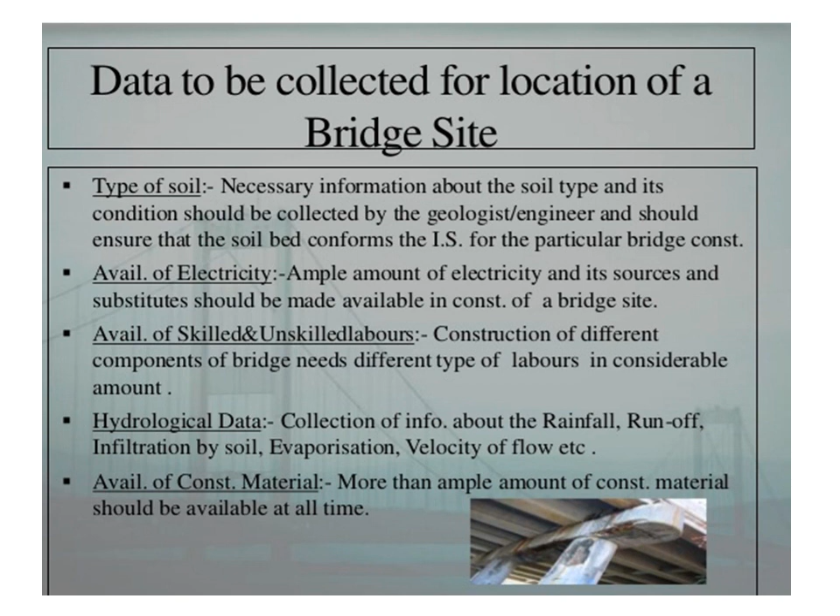Then in the hydrological data, the collection of information about the rainfall, runoff, infiltration by soil, evaporation and velocity, etc. has to be seen. Then the availability of construction material. More than ample amount of construction material should be available at all times. This is very much essential in order to maintain the economy of construction of the bridge.

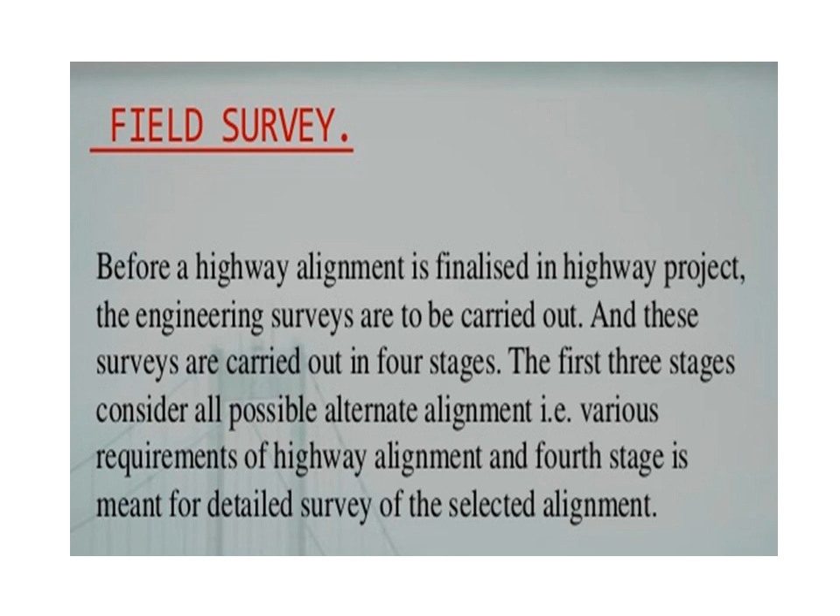After getting the data necessary for bridge location, we have to do the field survey, and in the field survey the highway alignment is finalized in a highway project. For that, engineering surveys are to be carried out in 4 stages. The first 3 stages consider all possible alternatives, that is various requirements of highway alignment, and the 4th stage is meant for detailed survey of the selected alignment, which may cover the reconnaissance survey, preliminary survey, location survey, and then detailed survey.

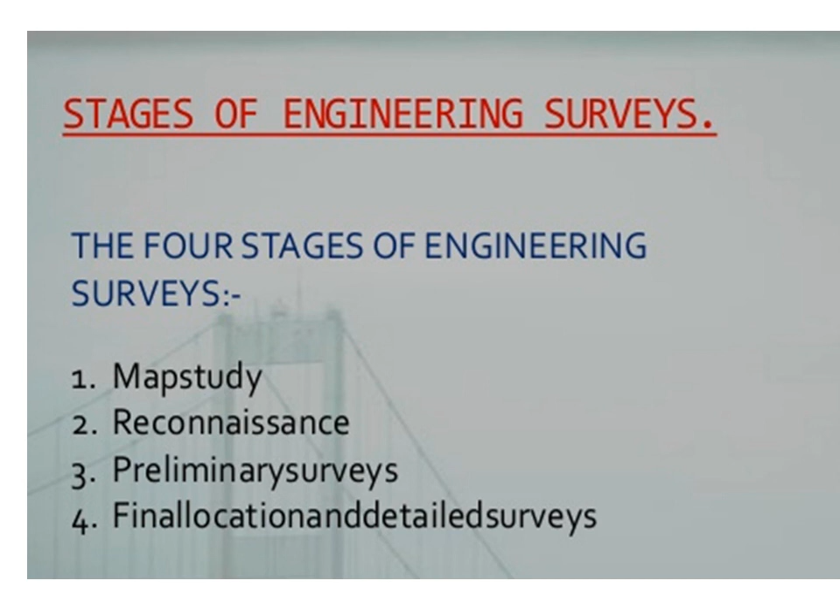Then in this slide we are going to see the different stages of engineering surveys. There are 4 stages: the map study, the reconnaissance survey, the preliminary survey, and final location and detailed survey. The map study is generally a topographic map of an area so as to suggest the possible route of the roads. The main features like rivers, hills, valleys, etc. are also shown in the map. By careful study of such maps, it is possible to have an idea of several alternative routes of the road.

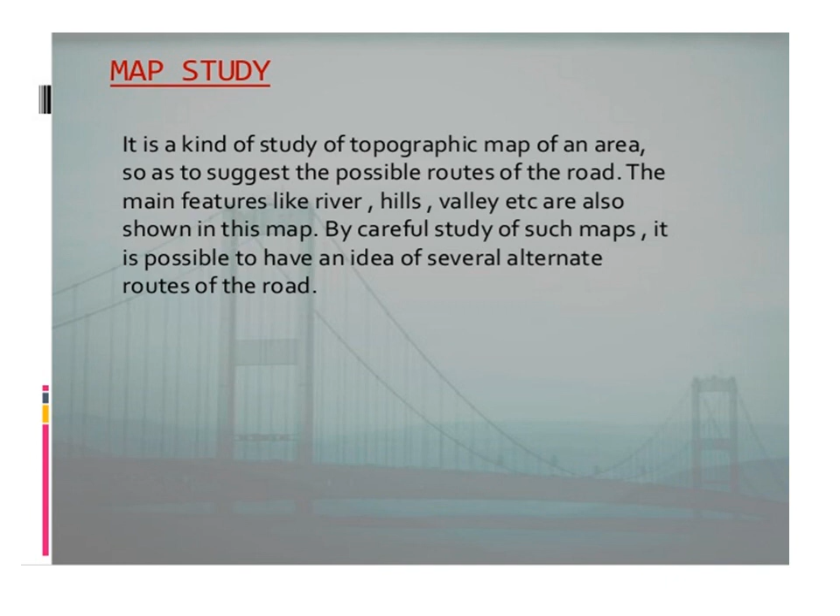Then next, the details from the map. Whenever we refer to the map to get information for surveying purposes, an alignment avoiding valleys, ponds or lakes should be considered. And in hills, the possibility of crossing through a mountain pass and the approximate location of the bridge site for crossing rivers should be selected. Even an alternative route with permissible gradient is to be selected from the map.

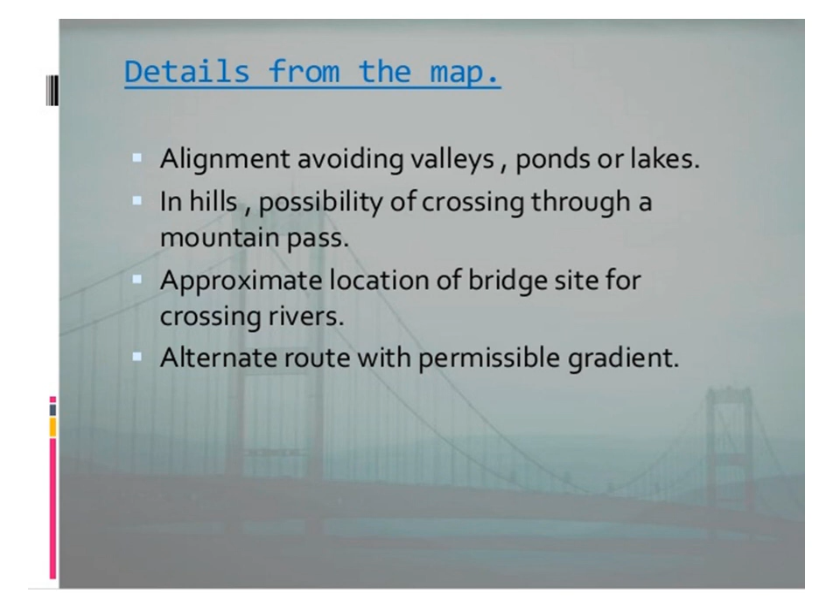Then the reconnaissance survey is the second stage of survey and is used to examine the general character of the area for deciding the most feasible route for the detailed study. A field surveyor may inspect a fairly broad stretch of land along the proposed alternative routes of the map in the field.

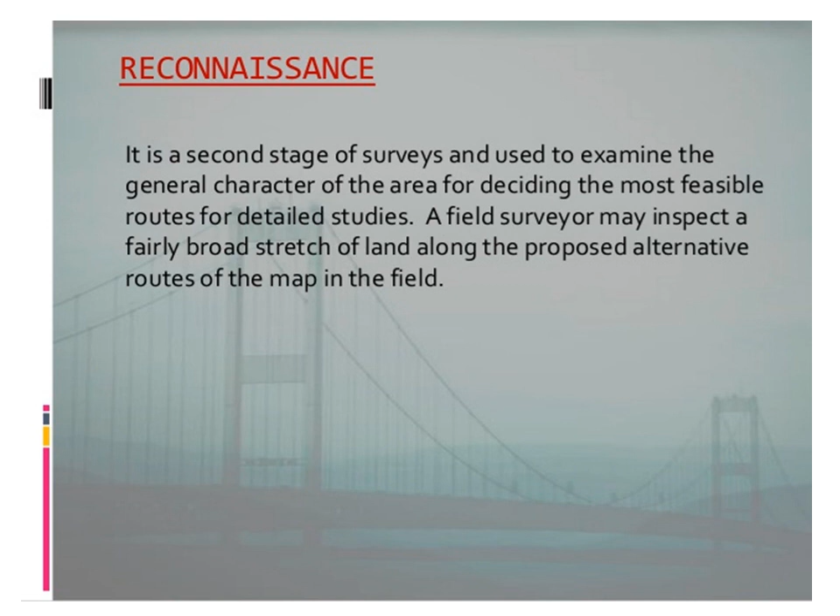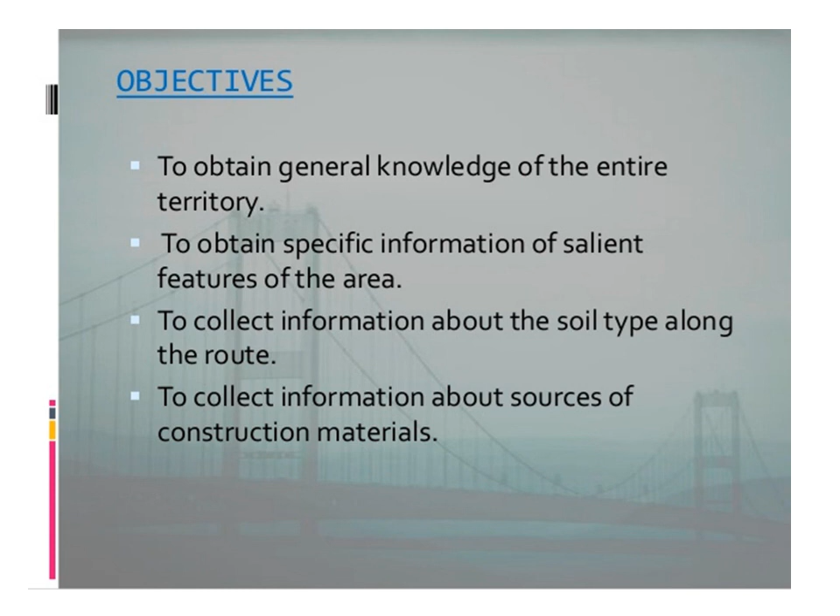The following are the objectives to be considered while doing the reconnaissance survey: to obtain general knowledge of the entire territory, to obtain specific information on salient features of the area, such as nala location, river location, etc., to collect information about the soil type along the route, and to collect information about sources of construction material. These are the important objectives of the reconnaissance survey.

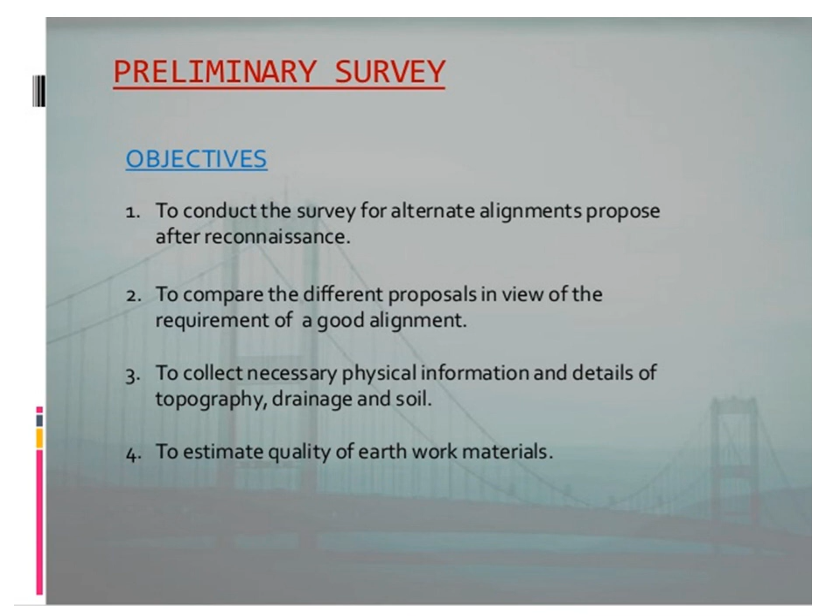The next survey after the reconnaissance survey is the preliminary survey, and the objectives are to survey alternative alignments after reconnaissance, and to compare the different proposals in view of the requirements of good alignment. Also, the survey is carried out to collect necessary physical information and details of topography, drainage and soil, and to estimate the quantity of earthwork materials.

After the objectives of the preliminary survey, we see the different procedures to be considered while conducting it. First is the primary traverse: the first step is to establish the traverse following the line recommended in the reconnaissance. The second step is topographic features: all geographic and other man-made features along the traverse and for a certain width are surveyed and plotted. Then leveling work is carried out side by side to give the center line profile and typical cross sections along the alignment.

Next is drainage studies and hydrological data. In this, the drainage investigation and hydrological data are collected so as to estimate the type, number and approximate sizes of cross drainage structures.

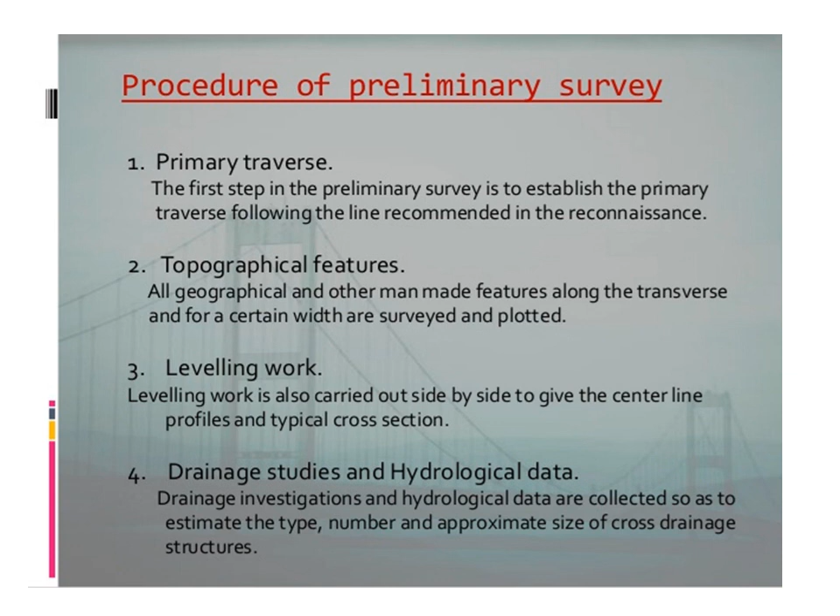Then the soil survey. It is an essential part of the preliminary survey, and with the help of this, the final location is decided.

Then the material survey. This survey is done for naturally occurring materials like stone aggregate and identification of suitable quarries for finding the leads while considering the estimate. This is very important.

Then traffic survey. This survey is conducted in the region for deciding the number of traffic lanes and roadway width, pavement design, and economic analysis of the highway project.

Then next is determination of final center line. After completing the preliminary survey and conducting comparative studies of alternative alignments, the final center line of the road is to be decided before the final location survey.

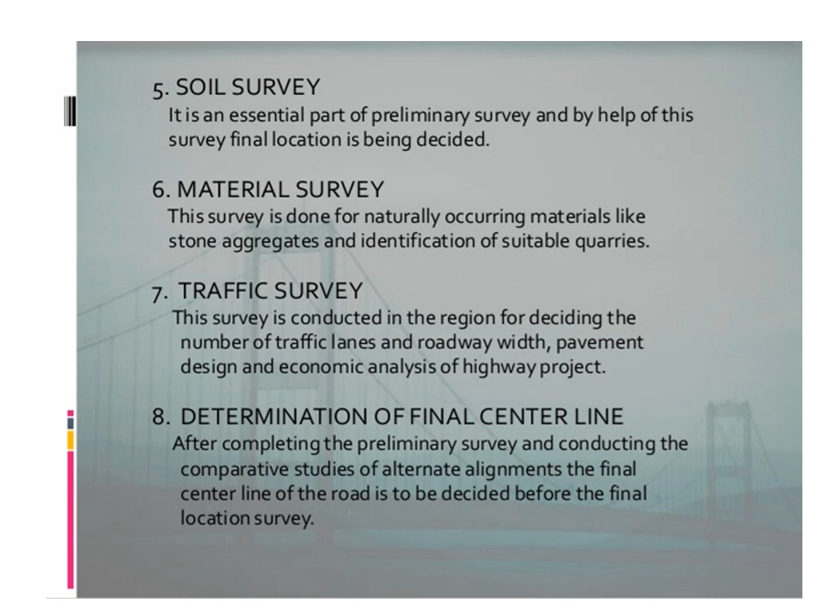In the final location and detailed survey, the alignment finalized after the preliminary survey, then detailed survey is carried out for the preparation of plans and construction details.

The location survey is carried out in two stages. First is on paper location, second is field location. Generally in the on paper location, the final route is put on the drawing and details such as gradient, radius of curve, etc. are marked clearly.

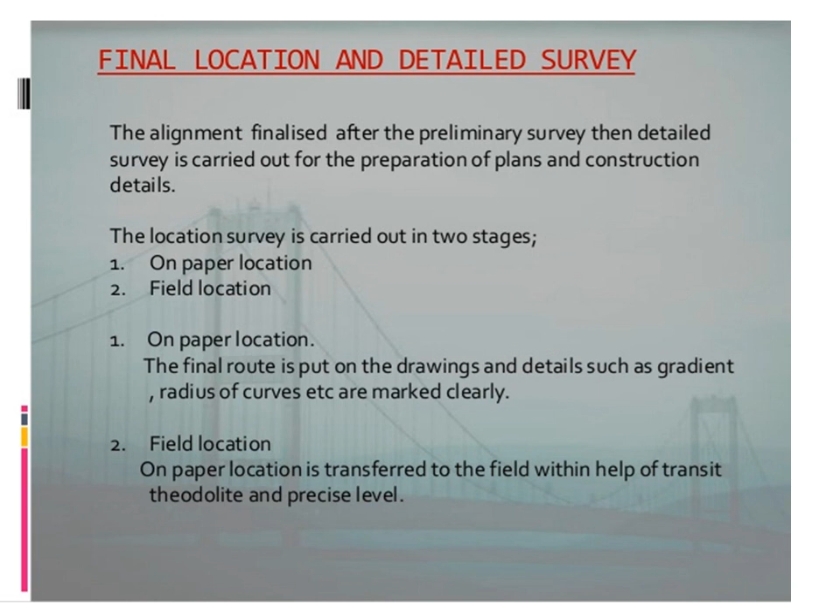Whereas in case of field location, the paper location is transferred to the field with the help of transit theodolite and precise level.

Nowadays, the help of GPS has been taken in order to ensure whether we have reached a perfect point or not. By making use of GPS, it is possible to go to the location where the alignment starts.

Then the detailed survey. Temporary benchmarks are fixed at intervals up to 250 meters. Vertical alignment, earthwork and drainage details are worked out from level notes.

Then a detailed soil survey is carried out and profile is established. And work on all rivers and valleys are surveyed in detail up to considerable distance on either side.

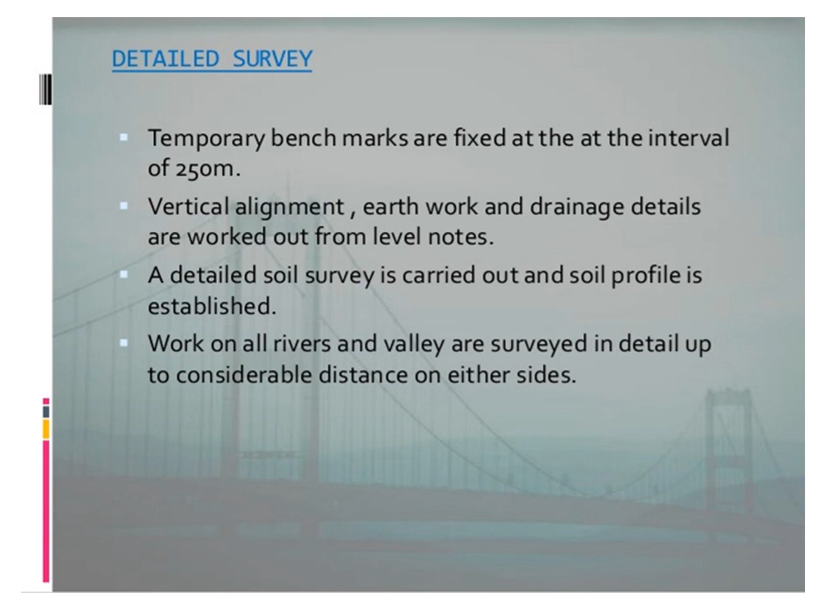Then after that, the drawings required for highway project are: key plan, index map, preliminary survey plans, detailed plans, longitudinal section, cross section, land acquisition plans, and drawing of road intersection.

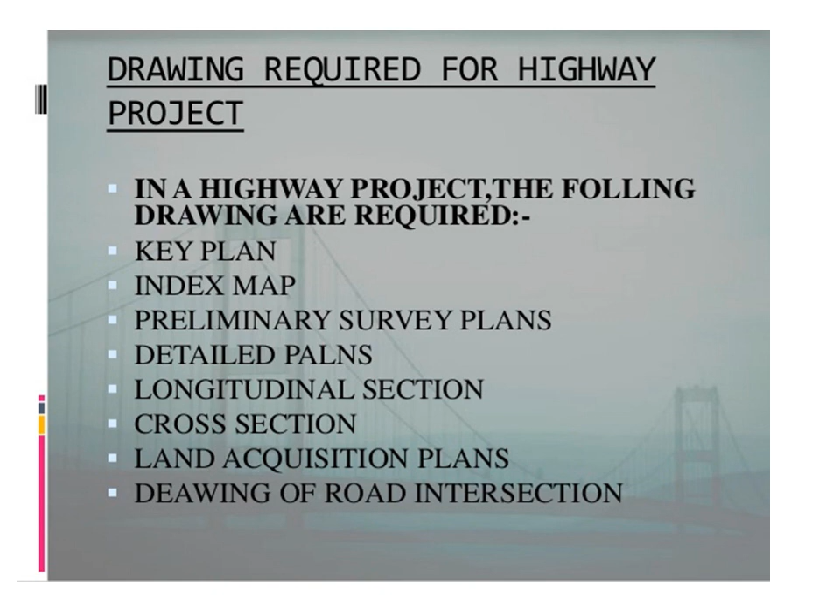In the key map, it shows how actually the project has to be done. This map shows proposed and existing roads and the important places to be connected. The size of map should not exceed 240 by 330 mm, that is having A4 size. Scale should be chosen depending upon the area.

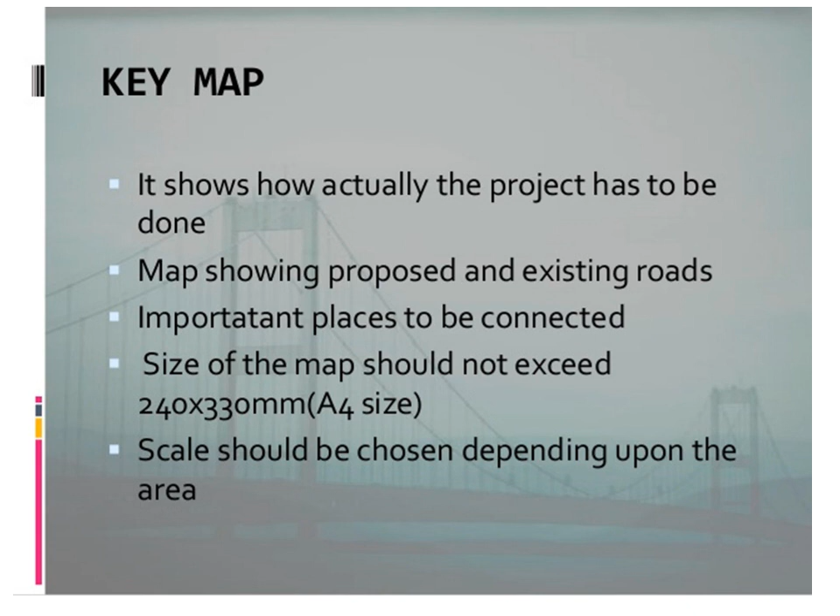Then the index map. It shows how actually the highway project looks like. It shows the general topography of the area. Details are symbolically represented in this particular map. The size of the map should not exceed 240 by 330 mm, that is it should have A4 size. The usual scale used for preparing the index map should be 1 cm equal to 0.5 km.

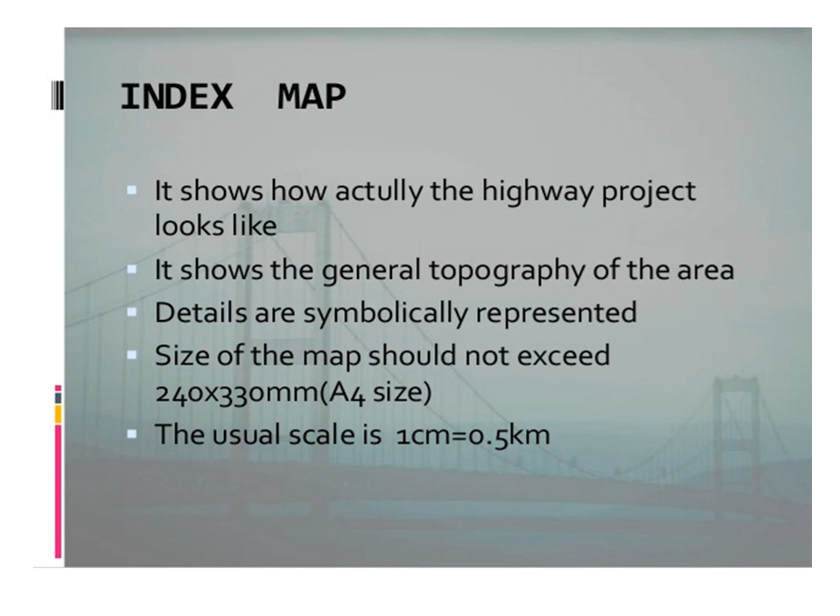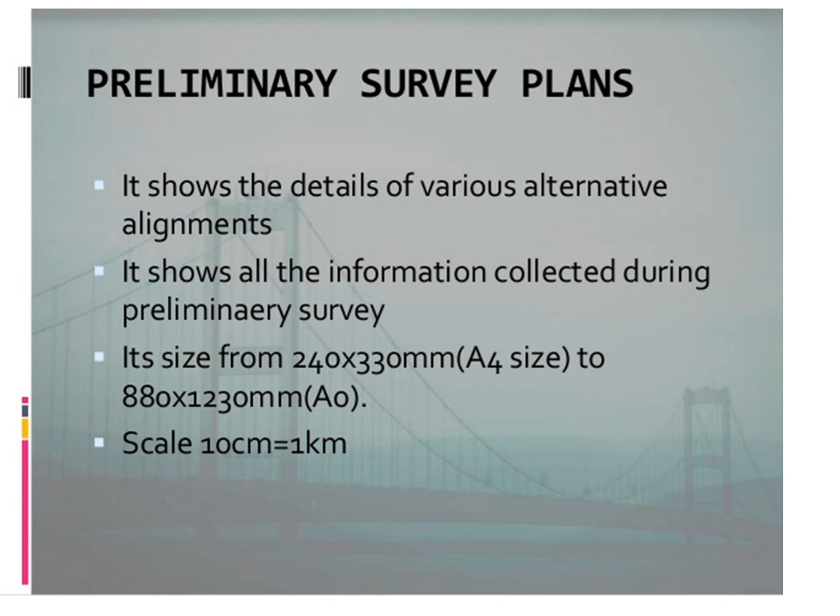Then the detail plan. It shows ground plan with alignment and boundaries, contour at interval of 1 to 2 meters in plain country and 3 to 6 in hilly areas. The size of drawing may be 625 by 880 mm. It should also have the existing structures, rivers, physical features, and they should be represented by making use of symbols.

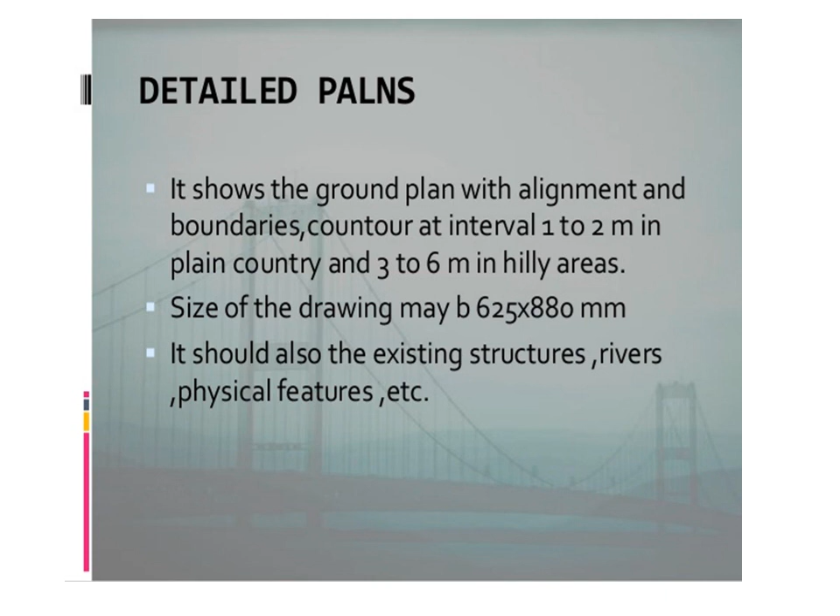Then longitudinal section. The longitudinal section, generally called L section, should be drawn to a horizontal scale of 1:2000 and vertical scale of 1:2000. The level should be taken at 50 meter interval for plain and rolling terrain, at 25 meter interval for hilly terrain. The L section should have information like chainages, horizontal and vertical alignment, datum level, ground level, formation level, depth of cutting, height of filling, position of cross roads, etc.

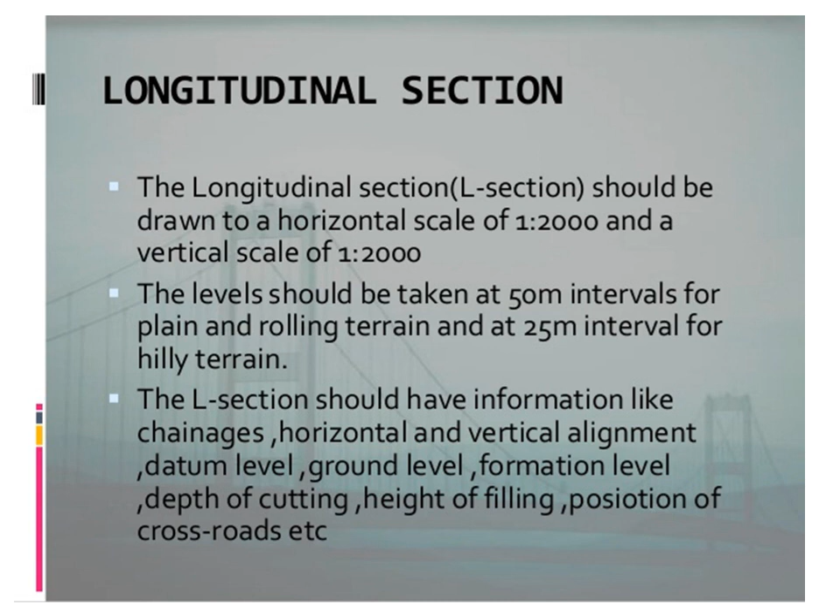Then cross sections. The cross section should be drawn at a scale of 1 cm equal to 2 to 2.5 meters. It should be drawn every 100 meters or where abrupt changes in levels are observed. We should include cross section number, the reduced distances, and the area of cutting and filling. In hill roads, cross sections should be drawn at closer intervals.

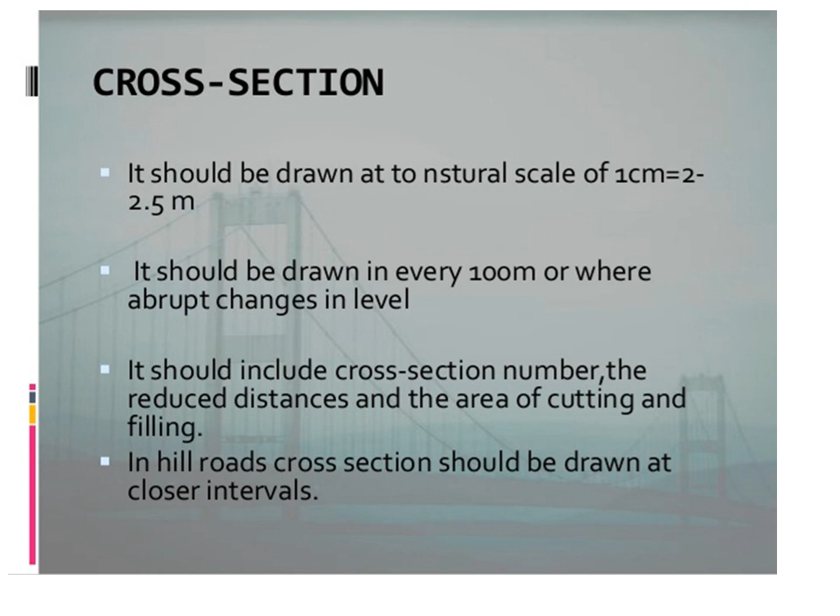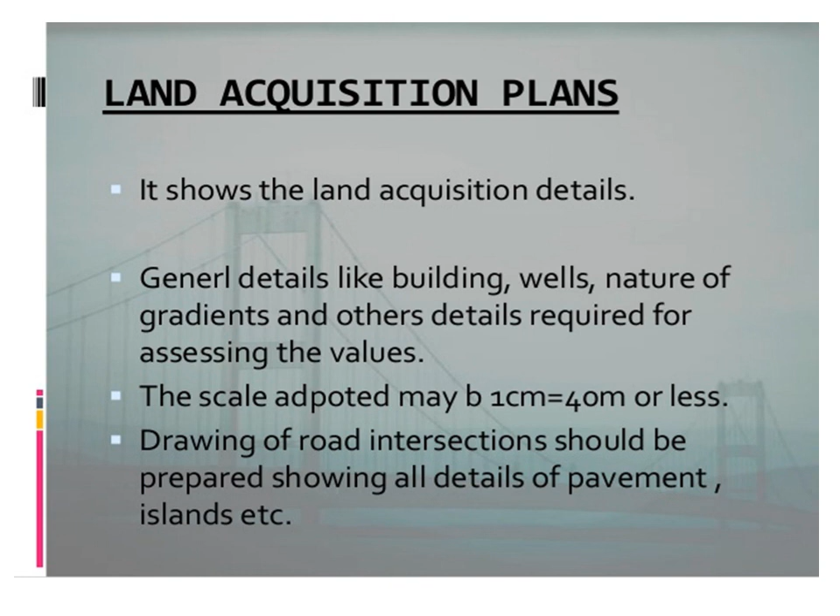Then the land acquisition plan. It shows the land acquisition details, general details like buildings, well, nature of gradient, and other details required for assessing the values. The scale adopted may be 1 cm equal to 40 meters or less. The drawing of road intersection should be prepared showing all details of pavement, island, etc.

Then the soil survey. It is an essential part of the preliminary survey, and with the help of this, the final location is decided.

Then the material survey. This survey is done for naturally occurring materials like stone and aggregate, and identification of suitable quarries for finding the leads while considering the estimate. This is very important. Then the traffic survey. This survey is conducted in the region for deciding the number of traffic lanes and roadway width, pavement design, and economic analysis of the highway project.

Then next is determination of the final center line. After completing the preliminary survey and conducting the comparative studies of alternative alignments, the final center line of the road is to be decided before the final location survey.

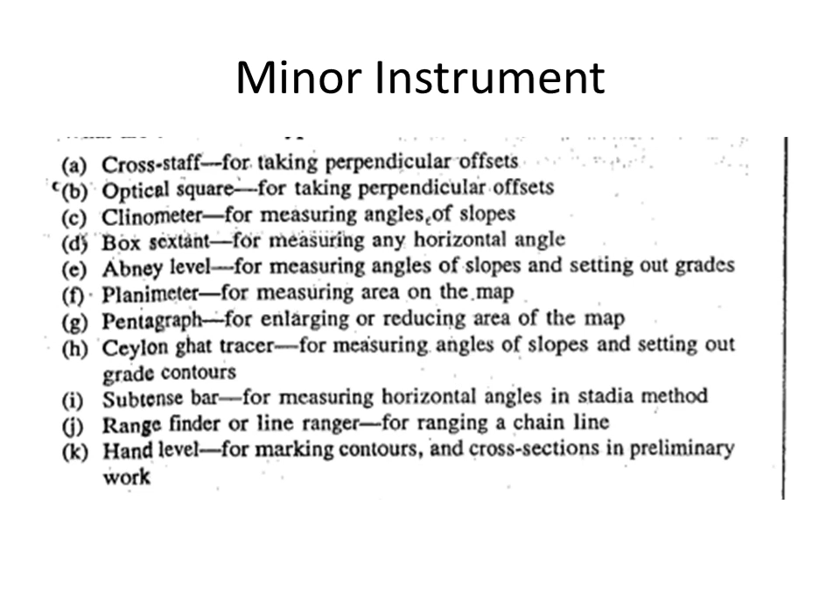The number of spans and the width of each are theoretically ascertained and plotted in a plan. The baseline C is taken perpendicular to the centerline AB. The distance AC is accurately measured by invar tape.

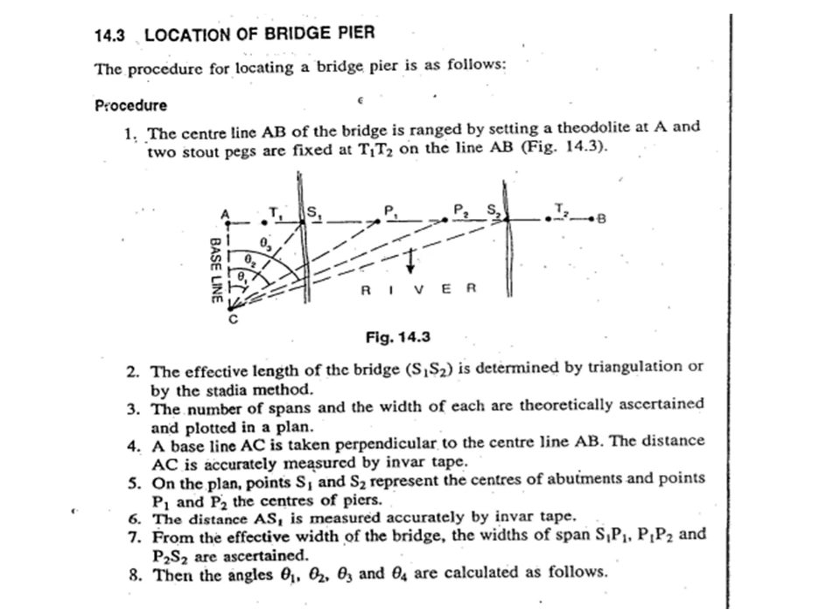Then on the plan, points S1 and S2 represent the center of abutments, and points P1 and P2 are the center of piers. The distance AS1 is measured accurately by invar tape. From the effective width of the bridge, the widths of span S1 P1, P1 P2, and P2 S2 are ascertained. Then the angles theta 1, theta 2, theta 3 and theta 4 are calculated as follows.

Then the next type of survey we are going to carry out after reconnaissance survey is preliminary survey, and the objectives are to conduct the survey for alternative alignment purposes after reconnaissance, and to compare the different proposals in view of the requirement of good alignment. Also, the survey is to be carried out to collect necessary physical information and details of topography, drainage and soil, and to estimate the quantity of earthwork materials. The preliminary survey is to be carried out.

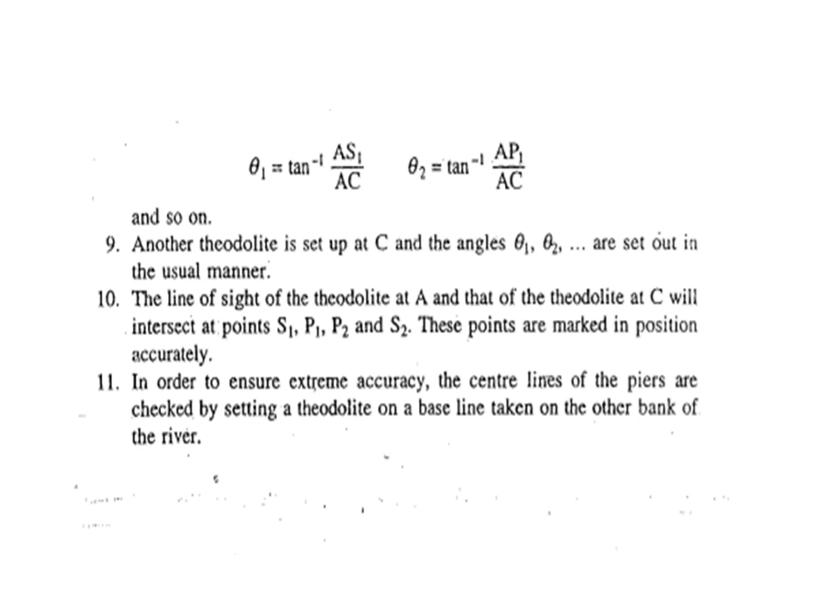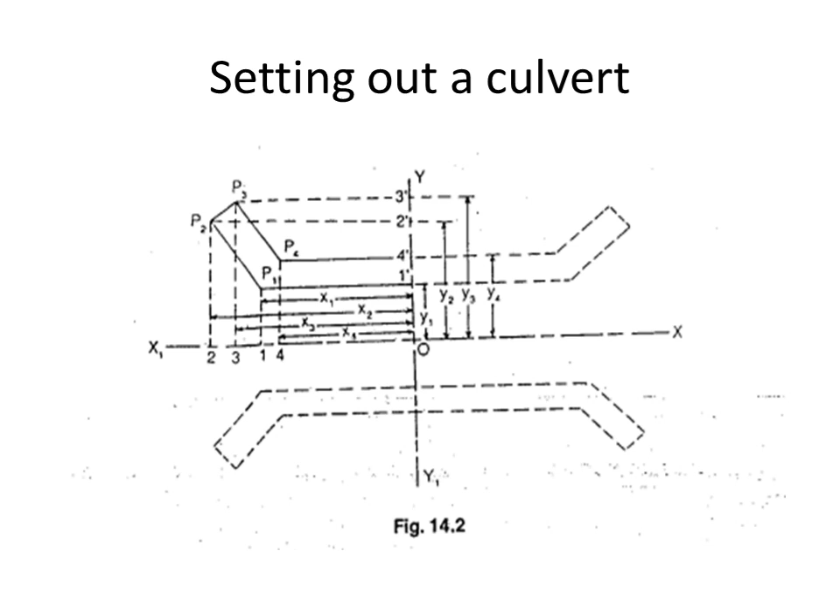Then next, the details from the map. Whenever we refer to the map in order to get information for the surveying purpose, alignment avoiding valleys, ponds or lakes should be considered. Also in hills, the possibility of crossing through a mountain pass and approximate location of bridge site for crossing rivers should be selected. Even an alternative route with permissible gradient is to be selected from the map.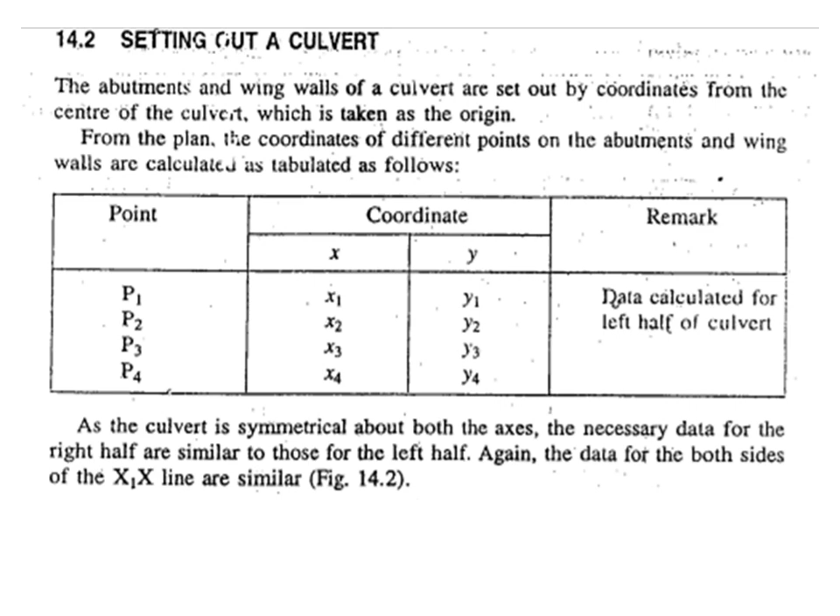Then while setting out the culvert, we have to follow the procedure given below. The axis, that is XX1, the centerline, and YY1 are set out with O as origin. Along the line OX1, points 1, 2, 3 and 4 are marked at distances x1, x2, x3 and x4 from the origin. Now along OY, points 1', 2', 3' and 4' are marked at distances y1, y2, y3 and y4 from O.

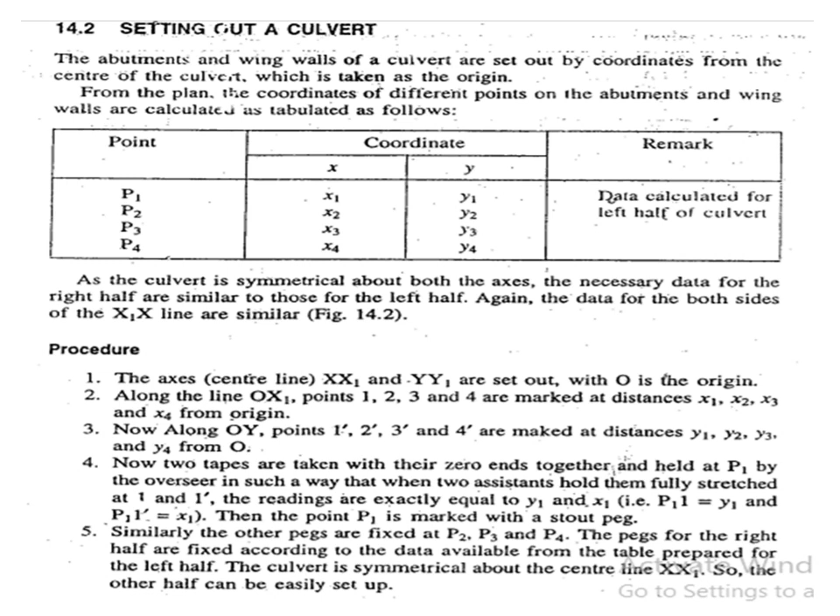Now two tapes are taken with zero ends together and held at P1 by the overseer in such a way that when two assistants hold them fully stretched at 1 and 1 dash, the readings are exactly equal to y1 and x1, that is P1 to 1 equal to y1, and P1 to 1 dash equal to x1. Then the point P1 is marked with the stout pegs. Similarly, the other pegs are fixed at P2, P3 and P4. The pegs for the right half are fixed according to the data available from the table prepared for the left half. The culvert is symmetrical about the center line XX1, so the other half can be easily set out.

Then the next type of survey we are going to carry out after reconnaissance survey is preliminary survey, and the objectives are to conduct the survey for alternative alignment purposes after reconnaissance, and to compare the different proposals in view of the requirement of good alignment. Also, the survey is to be carried out to collect necessary physical information and details of topography, drainage and soil, and to estimate the quantity of earthwork materials. The preliminary survey is to be carried out.